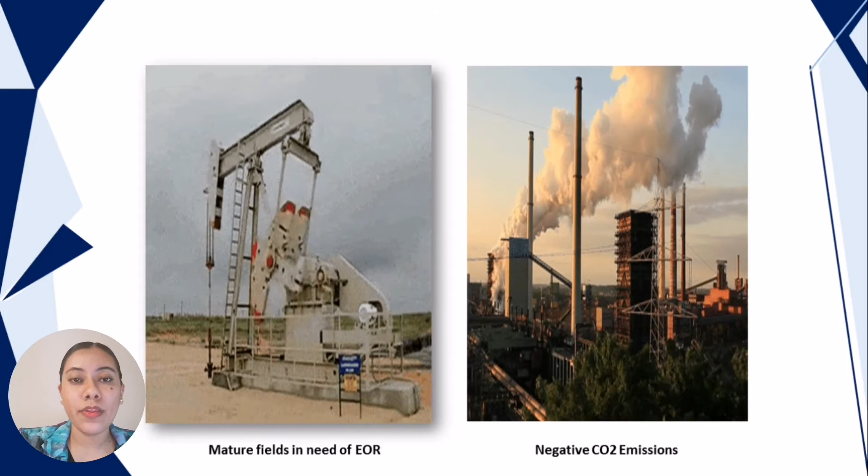We are witnessing an amplifying momentum for carbon capture. International Energy Agency and Intergovernmental Panel on Climate Change projections show a dramatic increase in carbon capture across all industries and geographies. Technically, the concept of capturing and storing CO2 underground is well understood. The challenge lies in balancing project frameworks and economic returns. That is, this with economic and environmental benefits too.

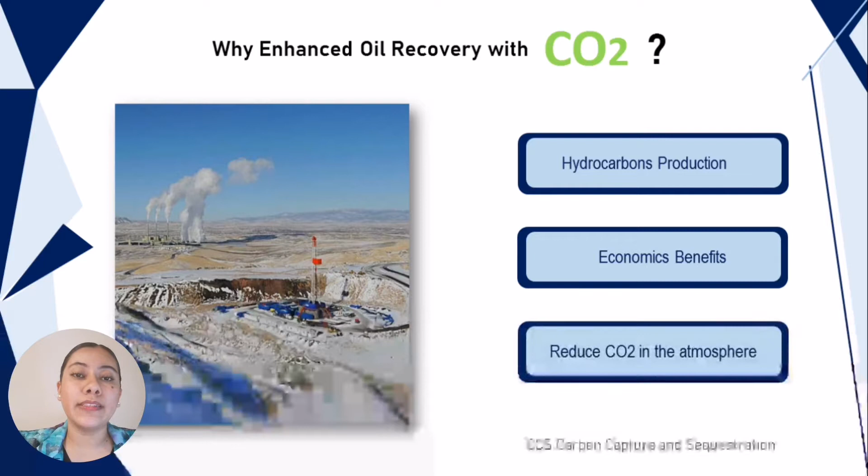Enhanced oil recovery increases hydrocarbon production, and that can be done with CO2 injection, which currently is the only method that provides economic benefits like producing additional volumes of hydrocarbons and making a large capture of carbon emitted by both fossil fuel or biomass power plants that otherwise could be vented to the atmosphere.

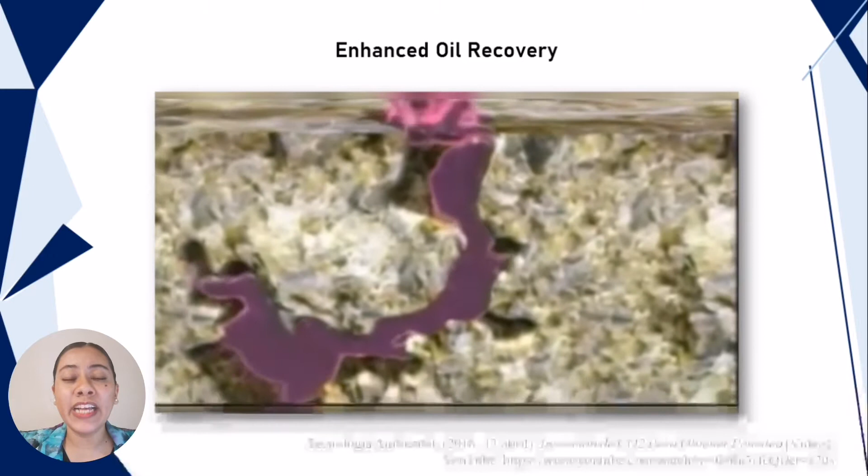We note that enhanced oil recovery results from the injection of gases, chemicals, or the use of thermal energy after carrying out primary and secondary recovery, since between 55 to 70% of the oil is still in the reservoir, as trapped microdrops in the pores of the reservoir rock. CO2 injection into the reservoir can mobilize the trapped oil.

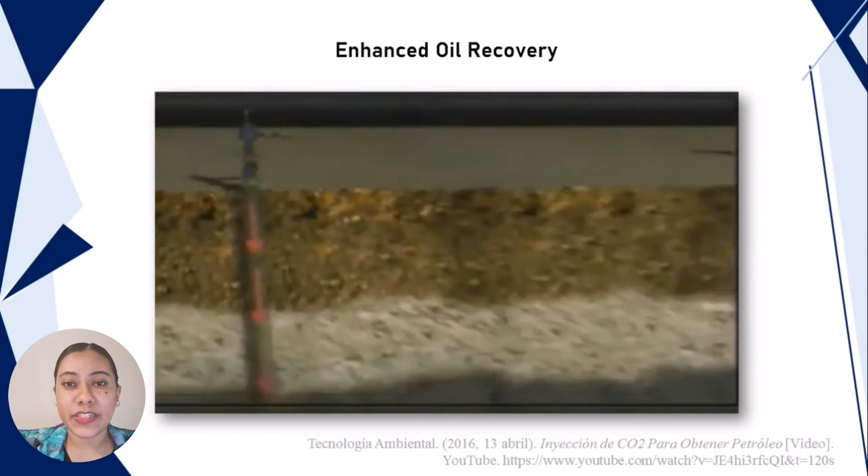When the CO2 enters the reservoir, it interacts physically and chemically with it, and with the contained oil, creating favorable conditions that improve the recovery. These conditions increase the reduction of capillary forces, since they inhibit, that is, repress the flow of oil through the pores of the reservoir, due to the presence of high interfacial tensions between the oil and the rock.

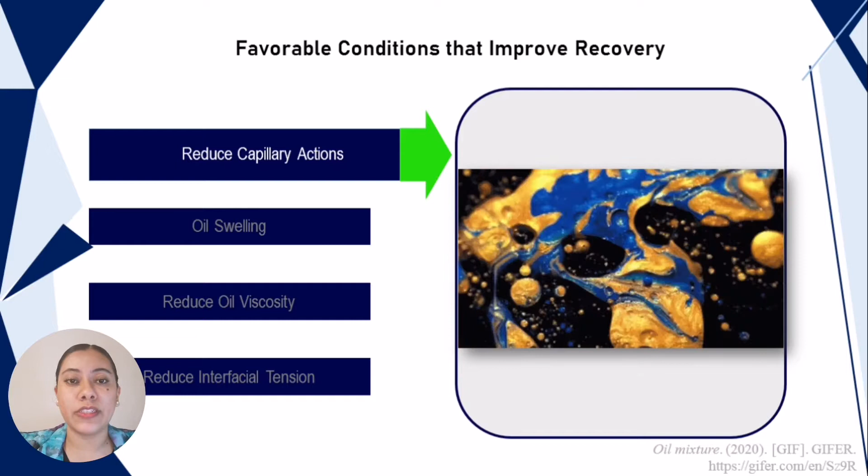Another condition that it creates is the oil expansion, or swelling as it is commonly known, which is going to occur due to an increase in solubility. The CO2 solubility in the oil depends on its composition, temperature, and pressure. This reduces the viscosity and the interfacial tensions between the oil and the rock.

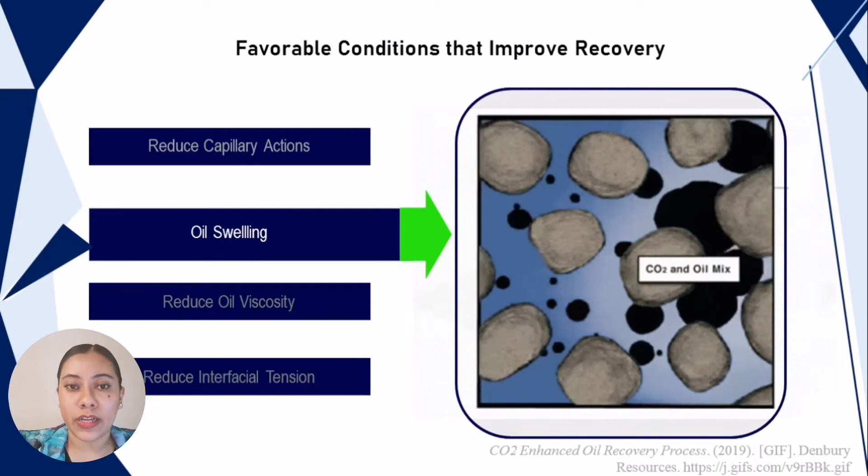By increasing the solubility with these factors, the oil swells and increases the relative permeability, improving mobility and at the same time creating a water blockage. Another condition that occurs is the oil viscosity decrease, which, as we saw, goes hand in hand with solubility. CO2 has a low viscosity relative to oil.

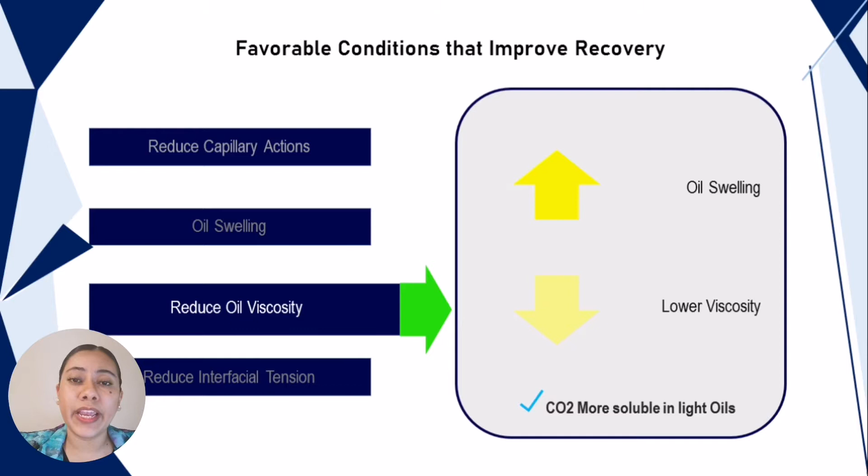For these reasons, oil reservoirs can contain high viscosities that are not candidates for CO2 miscible displacement. On the contrary, in light crudes, we can get a greater increase in swelling. Okay, another condition that presents and improves the recovery is the interfacial tension reduction. But what is this about interfacial tensions?

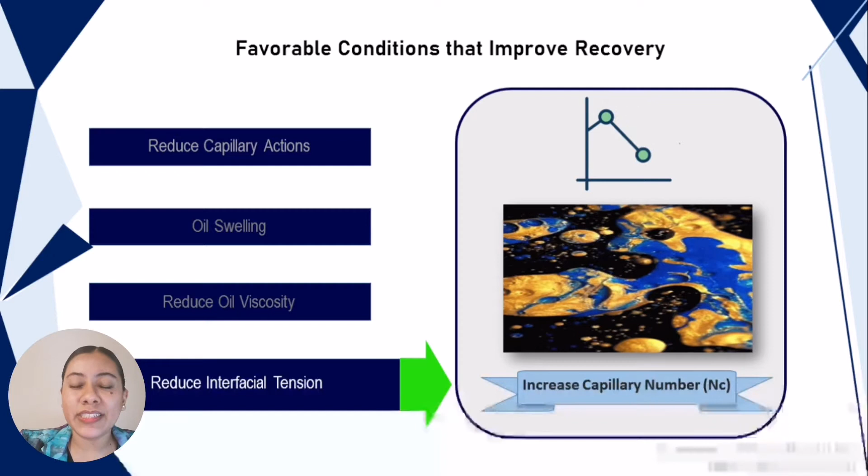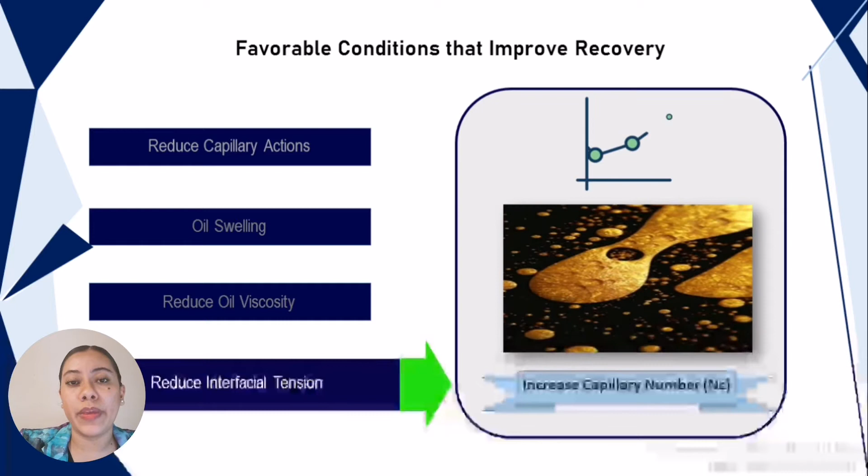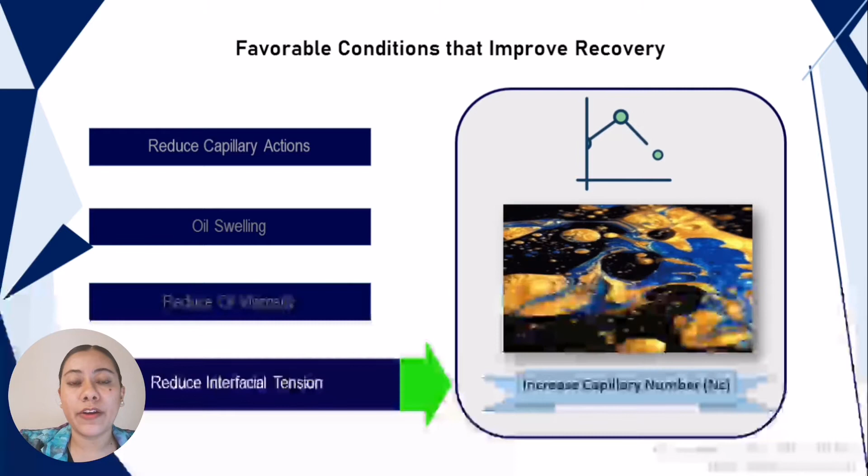This is the tension or resistance that will arise when making a break with an external force in order to achieve a mixture, in this case, the CO2 with the oil. In order to achieve this, we have to reduce these interfacial tensions, which will be achieved by increasing the capillary number. Increasing this, the viscous forces will predominate over the interfacial forces that exist in them.

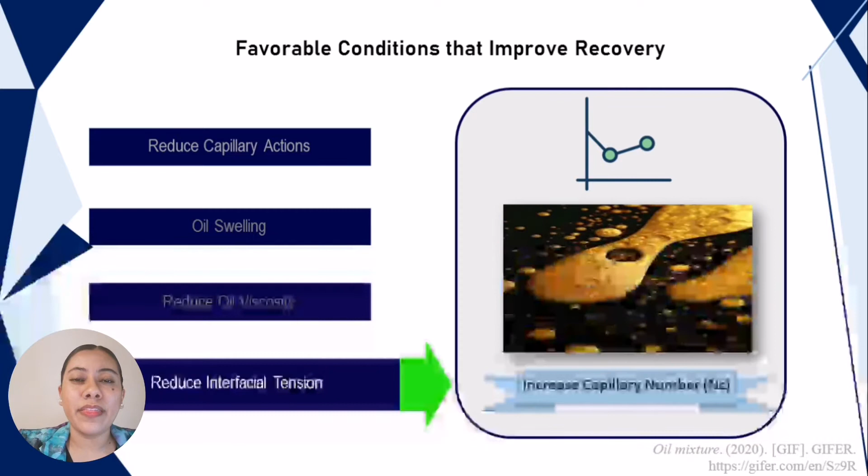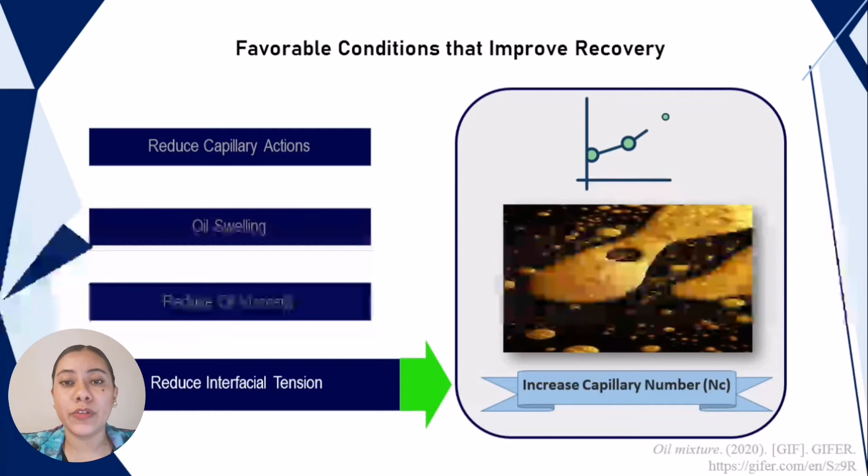Maybe this about the capillary number sounds a little bit confusing, but it is one of the most important factors to consider in recovery methods, since by increasing it by 3 or 4 orders of magnitude, recovery of almost 100% of oil in the swept zone can be achieved.

Okay, we talk about the reduction of the capillary forces, that are the forces that repress the flow of oil through the pores of the reservoir, and about the reduction of the interfacial tensions to be able to achieve a mixture. And we are going to achieve this too with the increasing of the capillary number. I'm talking about this, the capillary number.

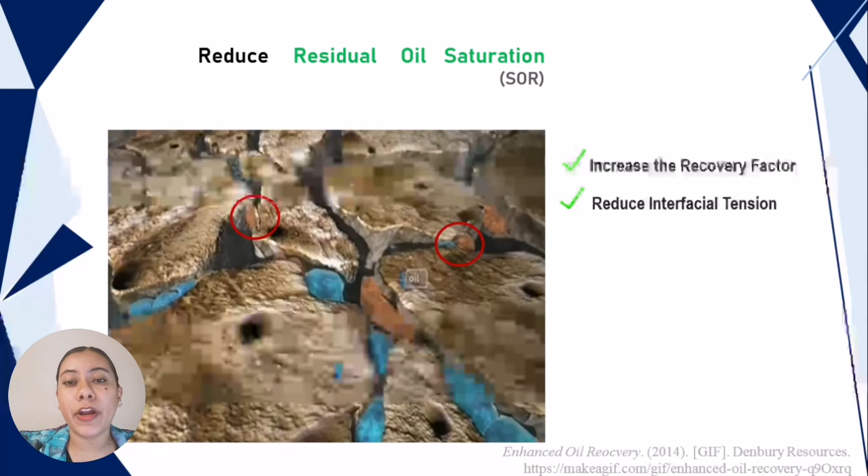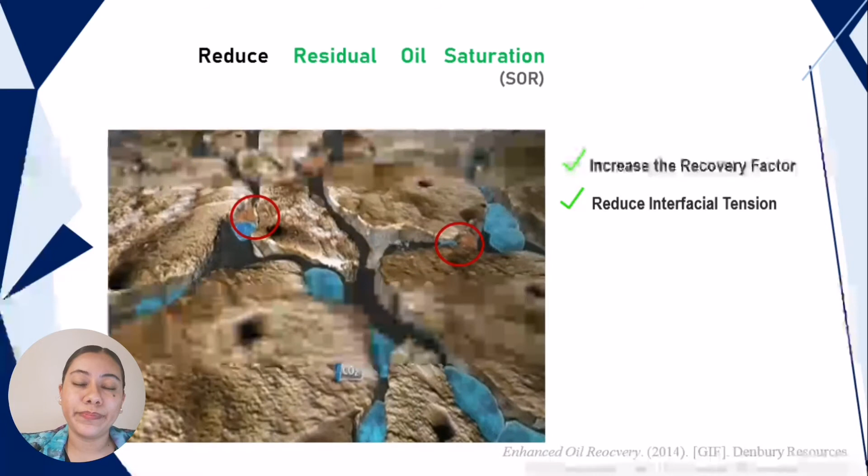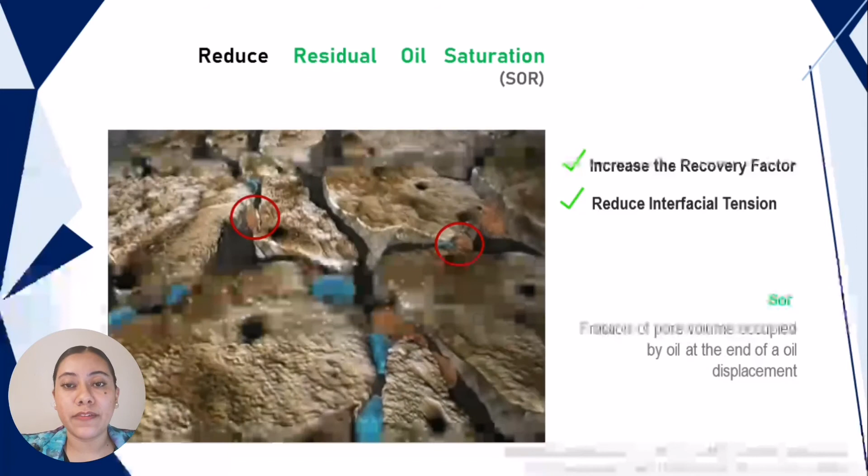We have another important concept, that is the residual oil saturation reduction, which for any miscible process will have the objective of taking it to the lowest possible value in order to increase the recovery factors, since thanks to miscible mixing of CO2 with the oil, the interfacial tension is reduced practically to zero. It must be remembered that the residual oil saturation is the volume fraction of the oil that remains in the pore at the end of a displacement process for which a specific fluid was used.

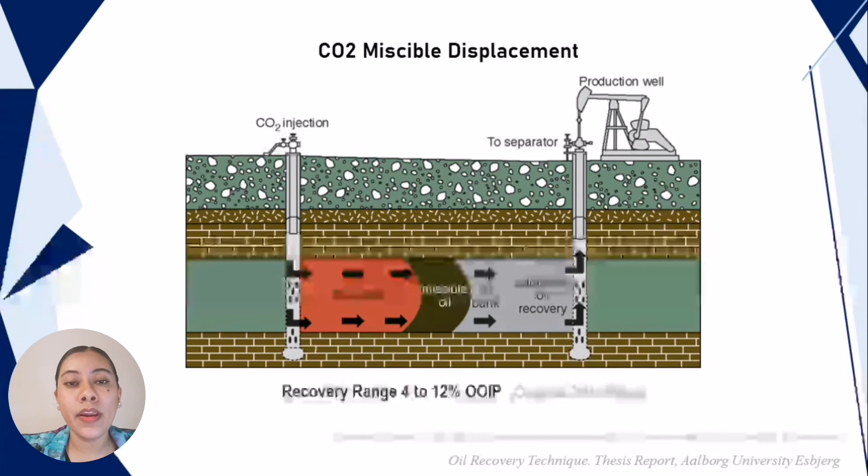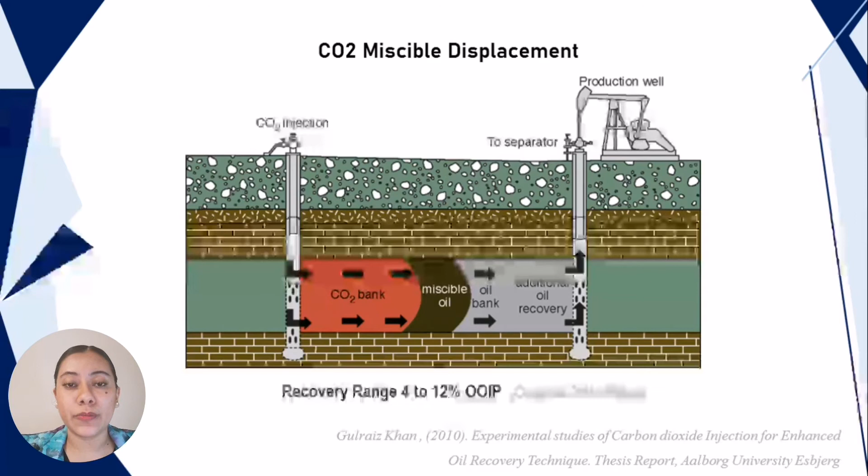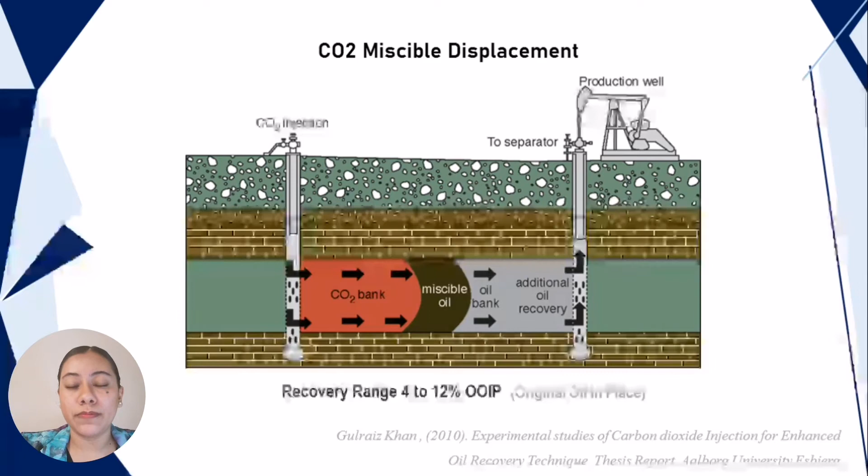But well, going back to the general part of the enhanced recovery with CO2, let's talk about the two displacement methods, which are the miscible and immiscible displacements. In miscible displacements, the CO2 injected is mixed completely with the oil in the reservoir, reducing the interfacial tensions between the two substances to almost zero. This forms a low viscosity fluid that can be easily displaced and produced. Recovery is usually 4 to 12% OOIP.

In immiscible displacements, when the reservoir pressure is too low and the oil density is too high, the CO2 injection doesn't mix with the oil inside the reservoir, but causes a swelling, the oil density is reduced, improving mobility and consequently increasing the oil recovery. This recovery could achieve 18%.

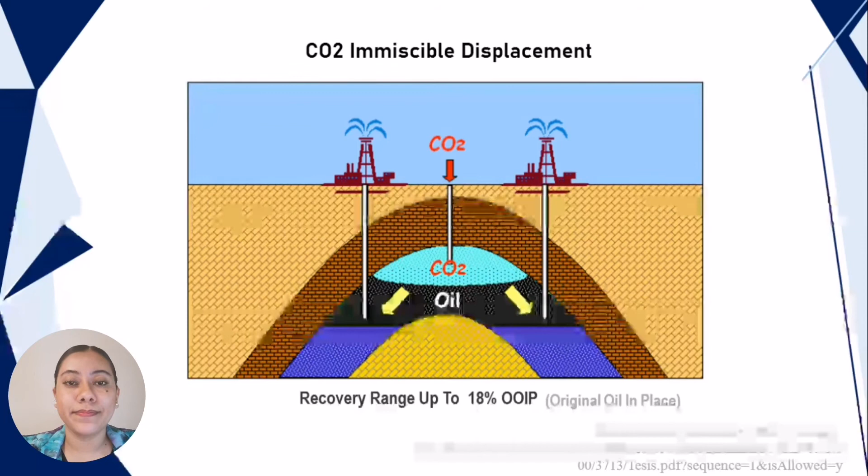Okay, one of the most used techniques in oil recovery with CO2 is the Huff and Puff technique, which consists in injecting CO2 in gaseous form into the formation. Once the CO2 is inside the formation, the well is closed for a period of time calculated to allow gas-liquid miscibility with the oil from the formation, and then the CO2 reacts with the connate water to form carbonic acid, which will react with the calcium carbonate from the storage rock, increasing permeability. After a certain time, the wells open in a controlled manner and must manifest an increase in production.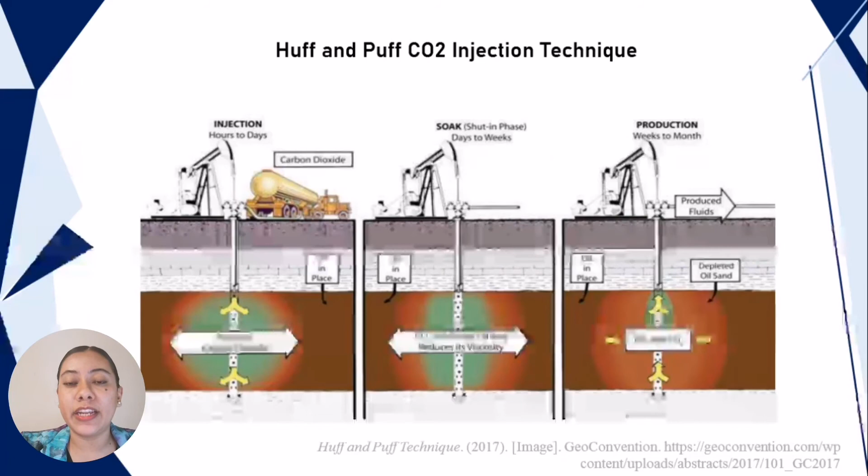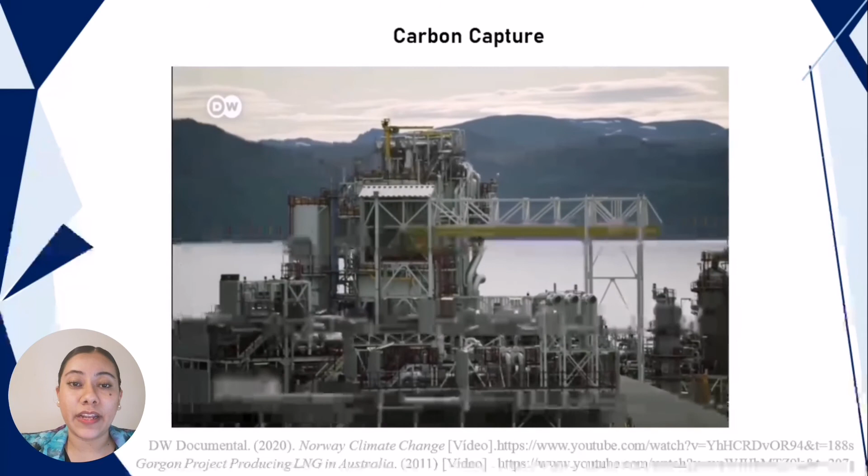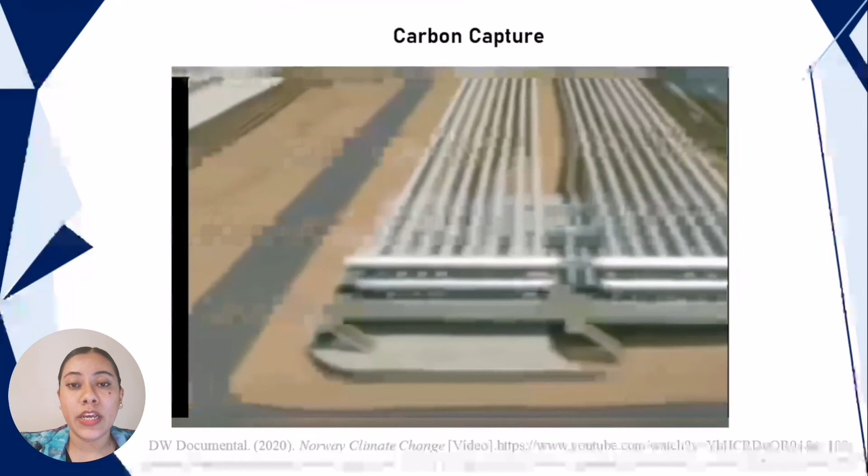Well, we know that the time is short, but at least we talked a little about the CO2 injection process, how it behaves and how the oil recovery is carried out. And I want to tell you that for CO2 capture there are different ways in which it's present throughout the world. There are industries that use it for enhanced oil recovery or only capture it and inject it into the earth in saline aquifers or depleted reservoirs.

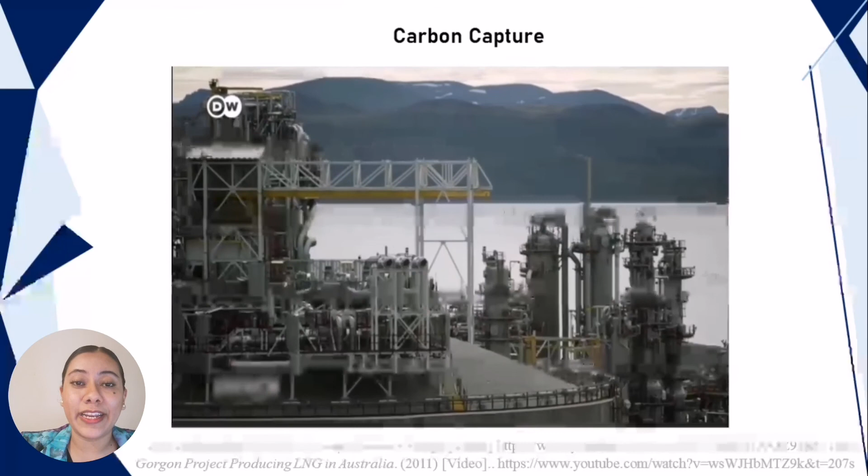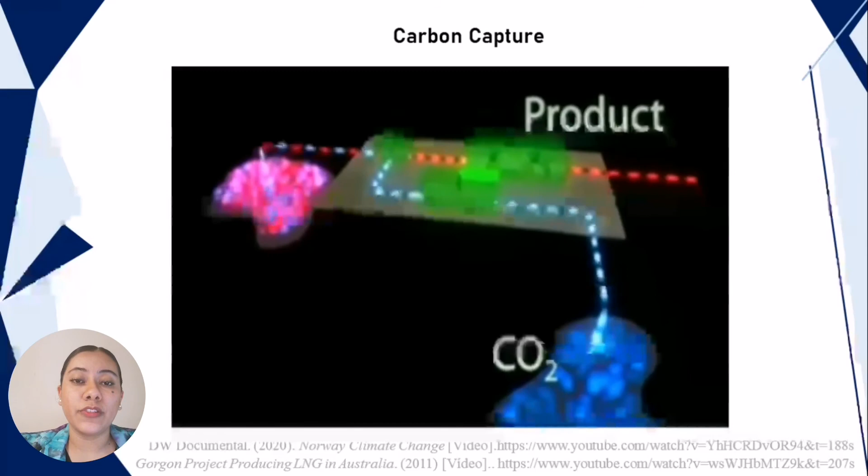And one of the most incredible examples of this is the Gorgon project on Barrow Island in Australia, operated by Chevron jointly with Shell and ExxonMobil, which expects to reduce greenhouse gas emissions from the Gorgon project by approximately 40%, or more than 100 million tons over the life of the injection project.

Well, with all of this, we conclude that enhanced recovery, in our country and in a large part of the wells that exist in the world, is one of the main activities the oil industry maintains, and that we can deal with one of the most important problems that we have today, that is the CO2 emissions. It's a project with huge processes and a lot of infrastructure in many aspects, but it is contributing to a sustainable development for our future generations.